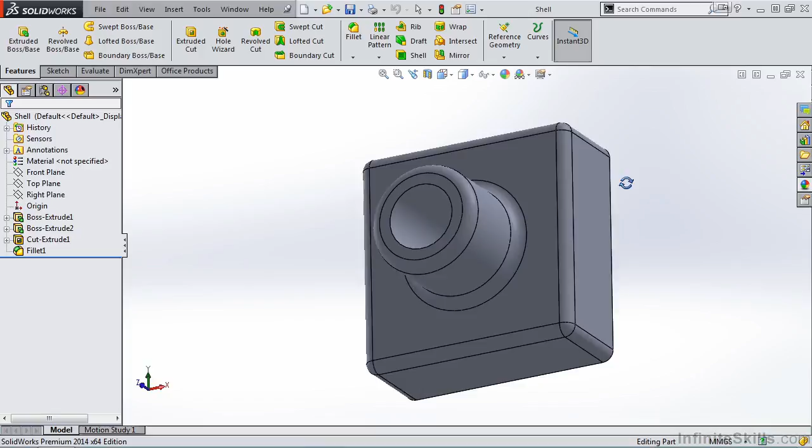In this lesson, we are going to cover the shell feature. But before we do that, let's take a look at the model we have on the screen. As I roll this model around, you will see it's nothing more than a solid base plate, along with a cylinder with a large bore extending through the middle of that cylinder. The part also consists of several fillets.

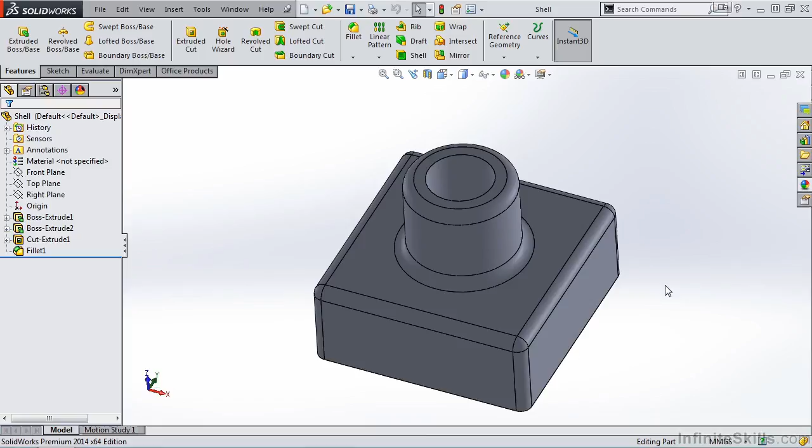If you would like to work along with me, you can find this part file in your Working Files folder under the part name Shell. So let's begin. I am going to select the shell icon. The Property Manager opens, and in the very first window, I am prompted for a shell thickness. I am going to change this 10 millimeters to 2 millimeters. I'll select outside of the window so the preview updates.

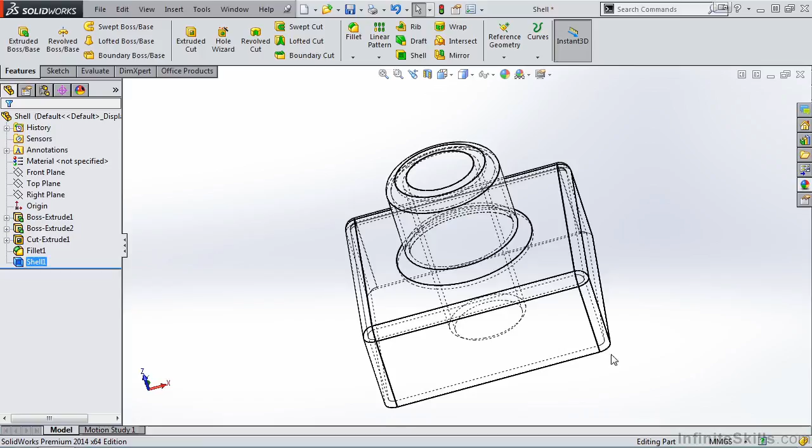Now before I do anything else in the Property Manager, I am going to click the green check mark and close out of the shell command. And notice the shell feature appears in the Feature Manager tree. However, if I roll the model, it will appear as though nothing happened. Let me change the view of the model. Let's change it from Shaded with Edges to Hidden Lines Visible. So now we have a wireframe with the hidden lines visible. And what the shell command did is hollowed out the part.

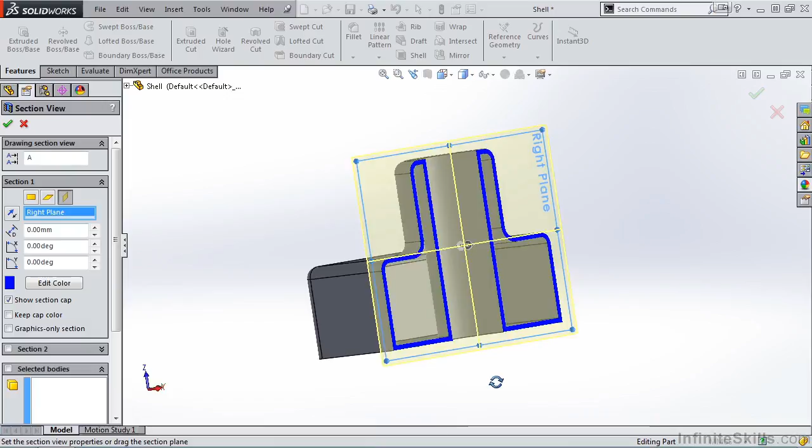Another way we can look at this, I'll place it back to Shaded with Edges and turn on the Section View tool. I'll switch over to the right plane, revolve the model, and you can see how the part is shelled out. I'm going to go ahead and close out of the Section View command, and I'm going to go to the Feature Manager tree and edit the Shell 1 feature.

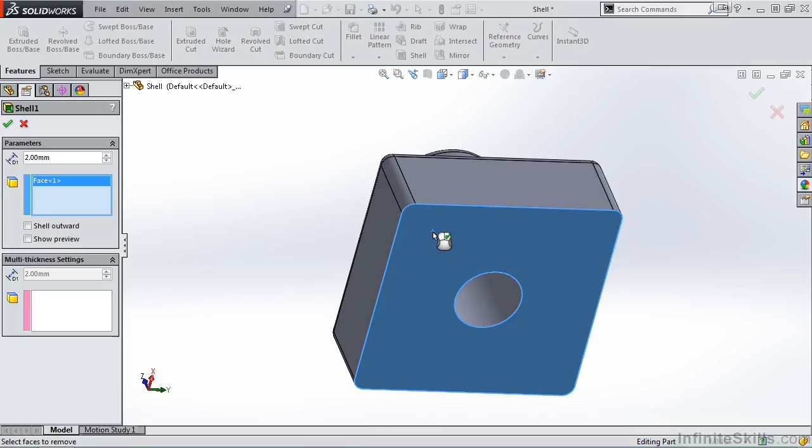Working down the Property Manager, the next window prompts me to select a face to remove. So this time, I am going to select the bottom face. Once again, I'll close out of the Property Manager, and you see the resulting geometry based on those settings. The bottom face of this part was removed. Let's go and edit the shell command again.

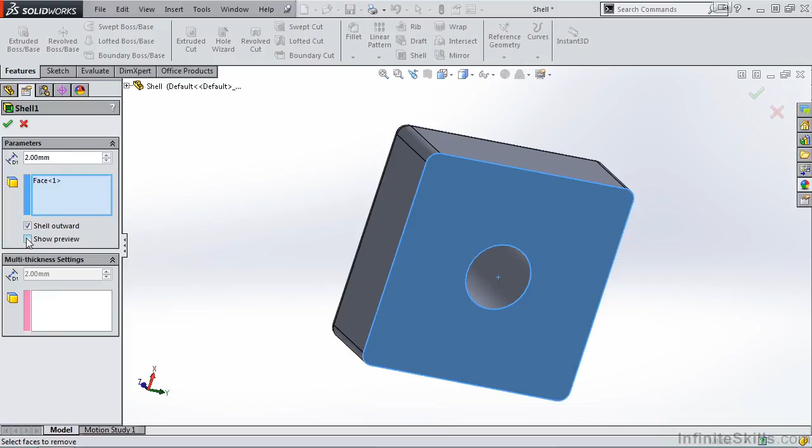Notice we do have the option to shell outward. And if I select Show Preview, and we take a closer look at the edge of the geometry, you can see when we shell outward how material is being added to the outside of the part, as compared to if I uncheck Shell Outward, the shelling feature will take place on the inside of the part.

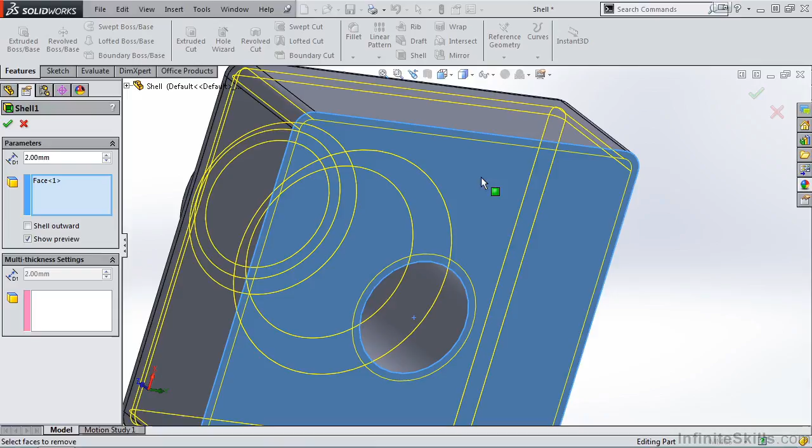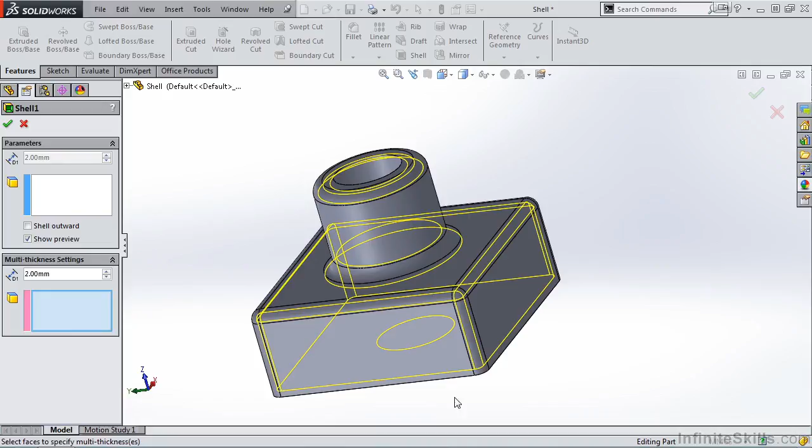Now, I am going to remove this face 1 from this window. So I'm going to clear selections. And the reason for that is I want to talk about the next item in the Property Manager, the multi-thickness setting. Right now, the part is hollowed out with a thickness of 2 millimeters. Let's have the bottom of the part have a thickness of 4 millimeters. So I'll select inside of this window, select the bottom face, and change this thickness to 4.

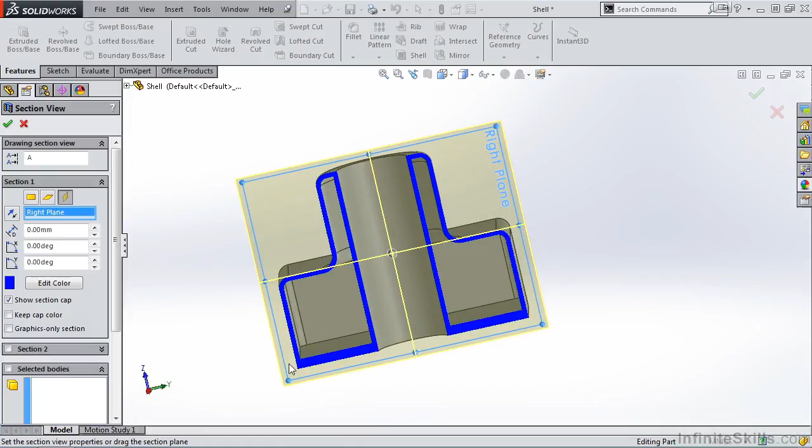I'll close out of the shell command, go to my Section View tool, switch over to the right plane, and you see the resulting geometry. We have a shell thickness of 2, and then we have a shell thickness of 4 for the bottom of the part.